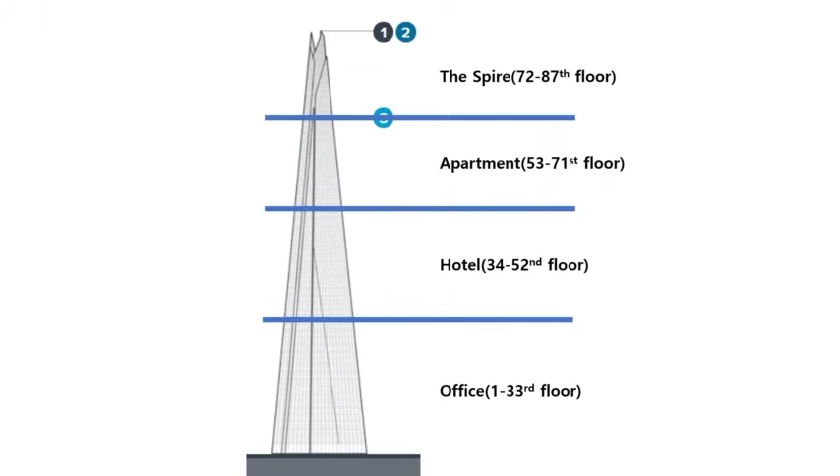Last week, we talked about structure characteristics. The Shard consists of 4 uses. Due to span and small construction area, the Shard is divided into 3 materials, and these materials have their own issues. Today, we will talk about the construction method of the Shard.

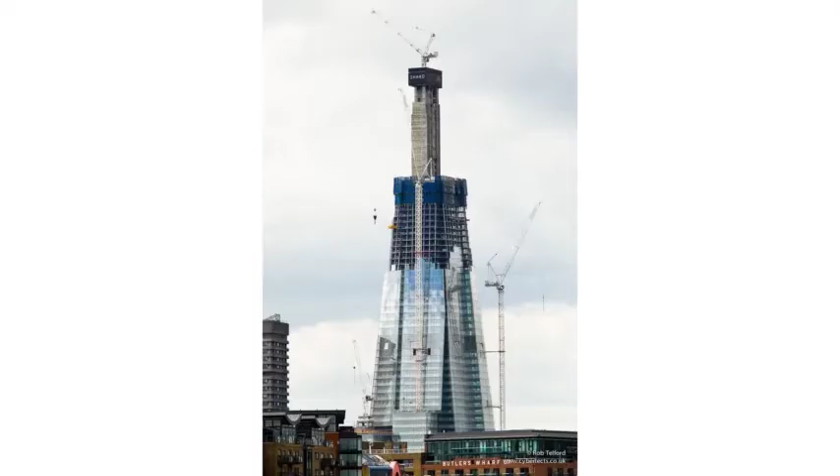In the Shard construction, there are 2 points. First is time. The Shard had to be constructed by the 2012 London Olympics. But the Shard construction started in 2009 due to the global financial crisis. So, the Shard has a 3-year time limit.

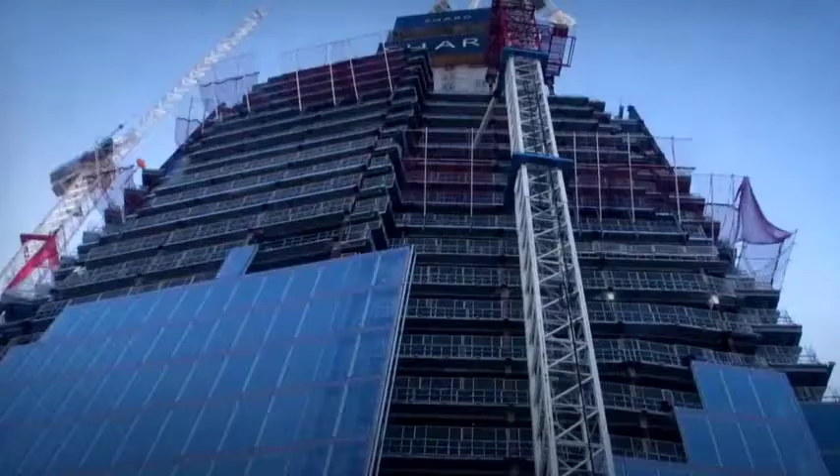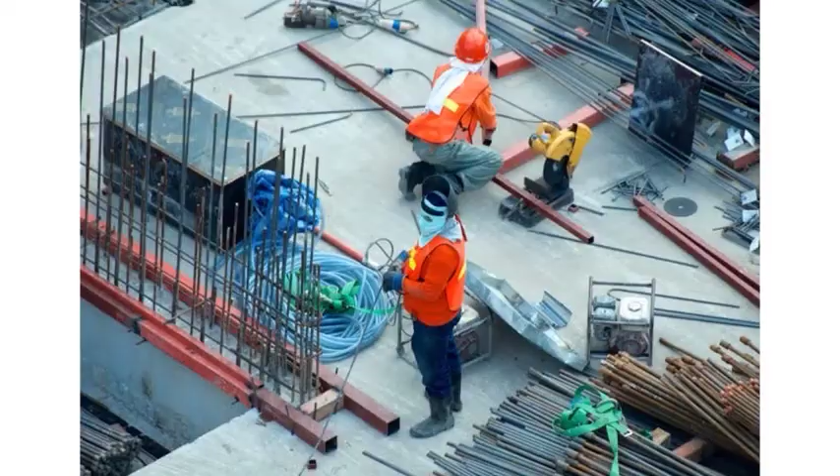4,000 workers, equipment, and materials must be transported 24 hours a day in an unfinished building. As workers increase, the waste of time is bigger. So, to decrease time waste, getting building workers, materials, and equipment to the right place at the right time is very important.

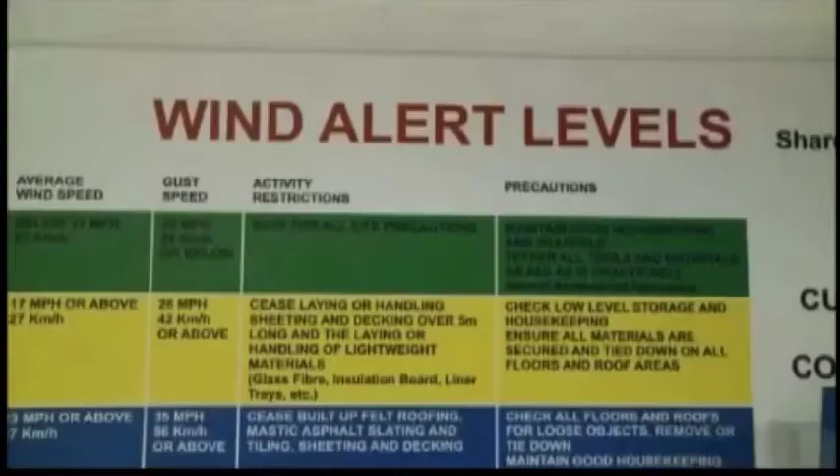Second is wind. By the SimScale simulation, the Shard receives a lot of wind. This can affect construction. To prevent wind from affecting construction, the Shard engineers check the wind speed every day.

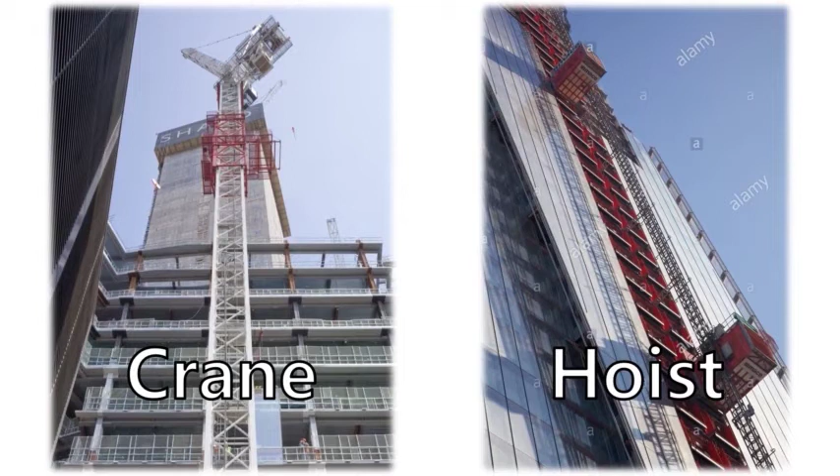Because of these 2 points, there are some problems with the crane and external hoist. The crane can collapse, or the materials in transportation may fall due to the strong wind. And the external hoist was too slow, and it is located outside of the building, affected by weather such as wind and rain.

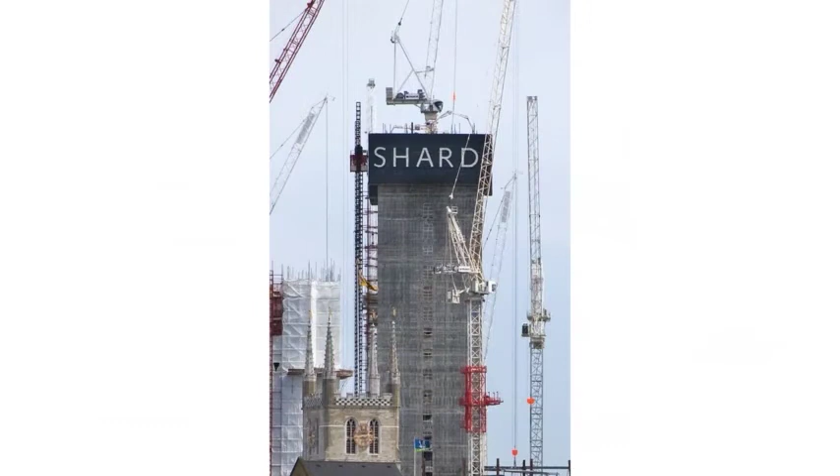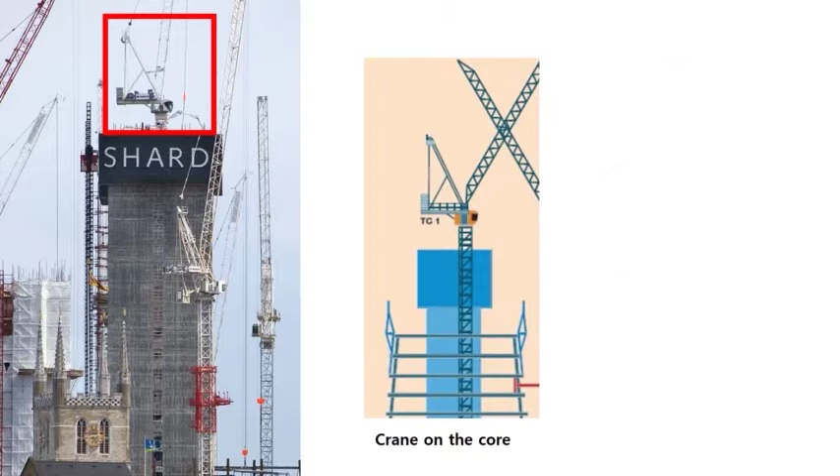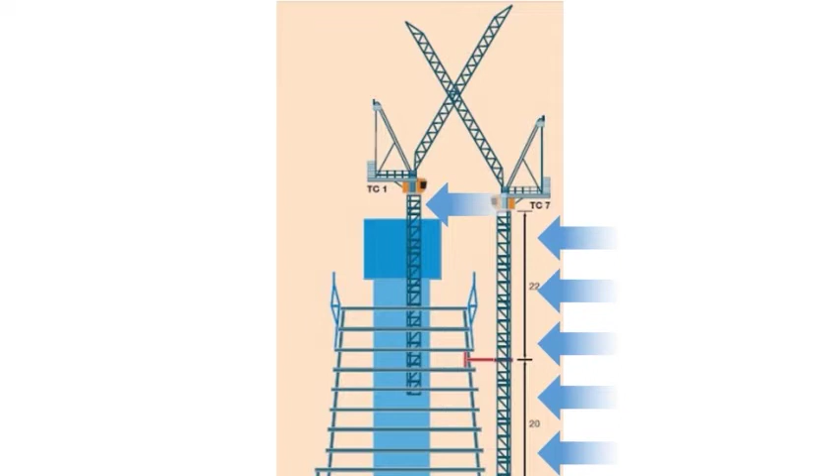To solve these problems, the Shard uses a slip-form core. Over the core, a crane is installed and a jump lift is installed below. The crane on the core, named TC1, receives less wind, and it can prevent wind collapse. This crane is attached to the core, so the core and TC1 go up together. So it reduces the number of crane climbings.

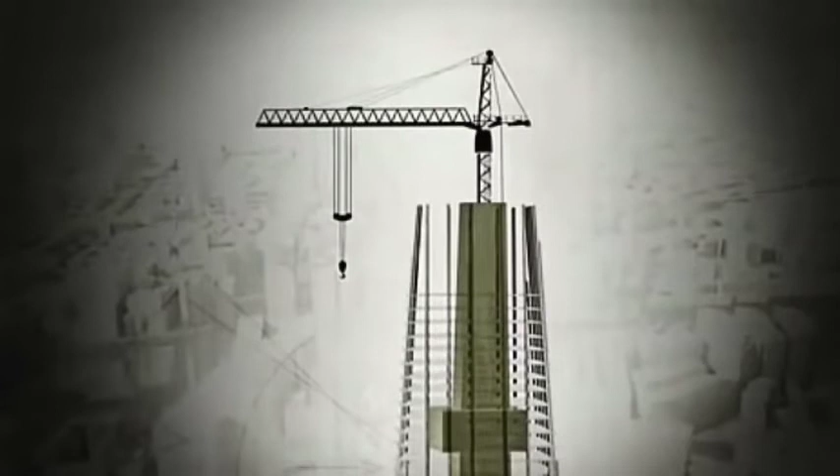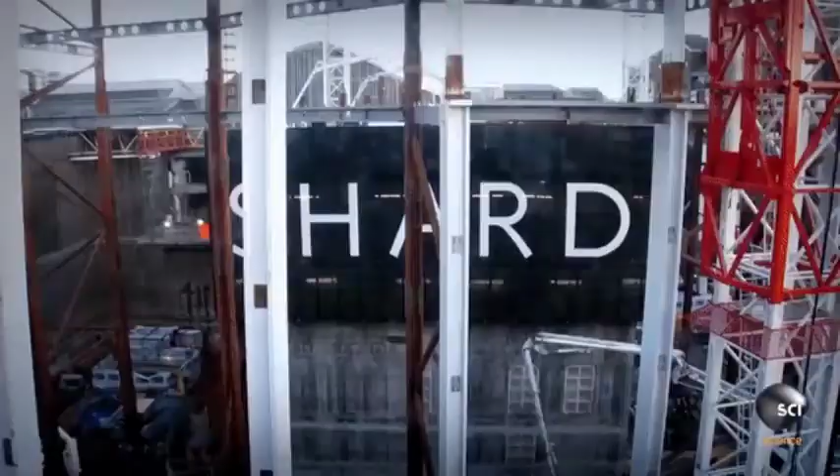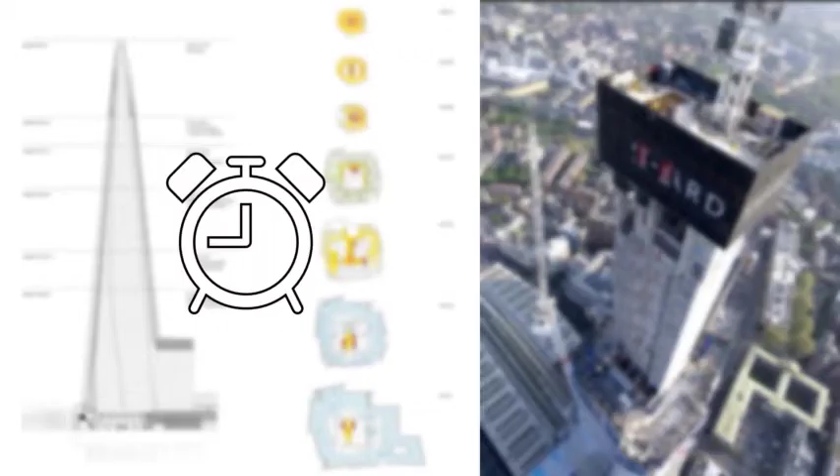In low construction, due to low wind and large area, tower cranes on the ground are used to construct with TC1. But in high construction, because of TC1 and the smaller construction area, there was only one high-rise crane. So they saved the time and money to build extra high-rise cranes or extend crane height.

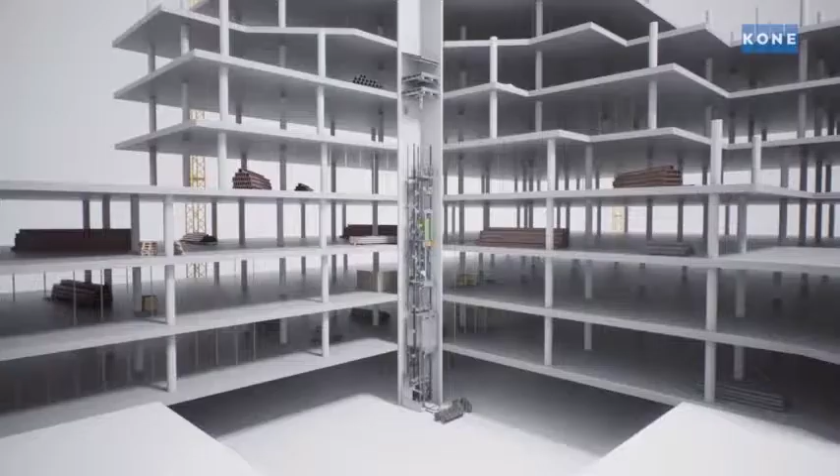Jump lift is an elevator in the core. It uses the elevator hoistway inside the core, so it is not affected by weather and is safe. And the lift is a permanent elevator, so it is fast. To install the jump lift, first, a protection deck is attached to the slip-form, deflecting any object that may fall into the shaft.

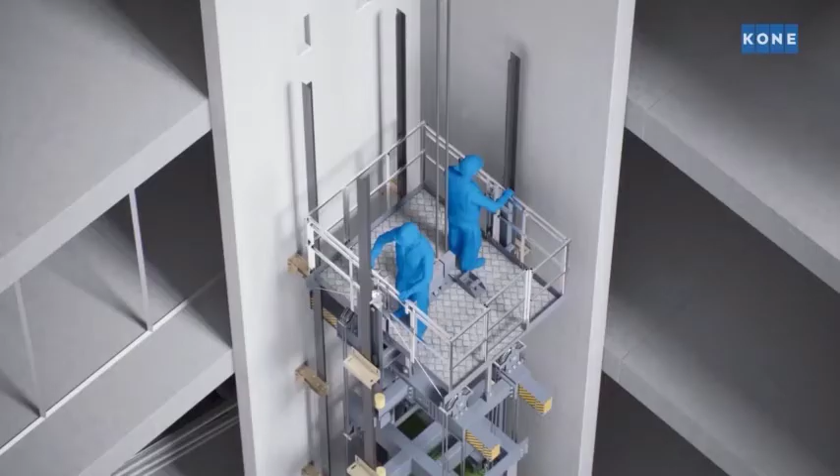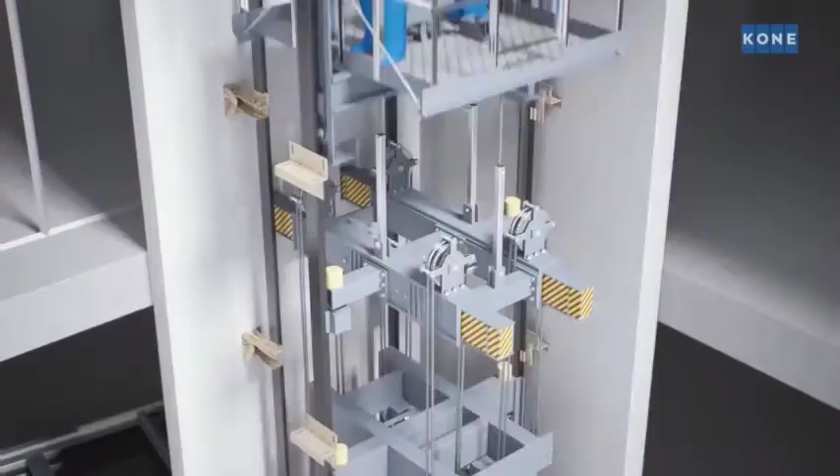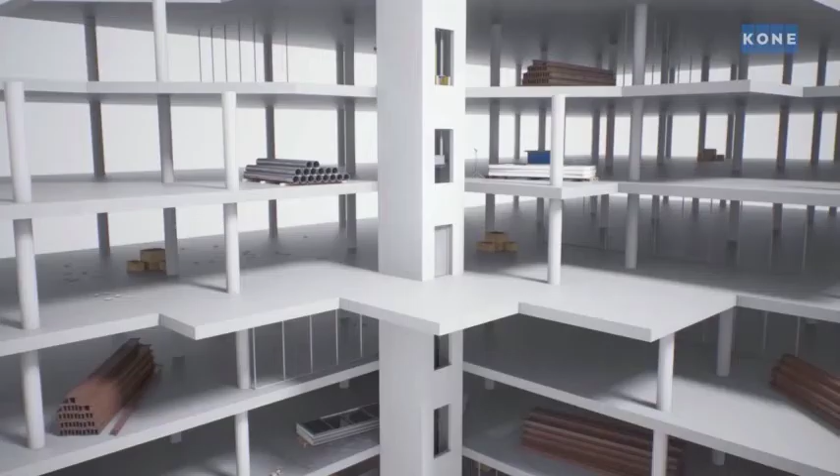Next, the installation platform is used to install the guide rails and other elevator shaft components. Next, the mobile machine room, which controls the lift, jumps as the building work progresses. Then, the permanent elevator, which will be used after construction, moves below the machine room to transport workers, materials, and equipment.

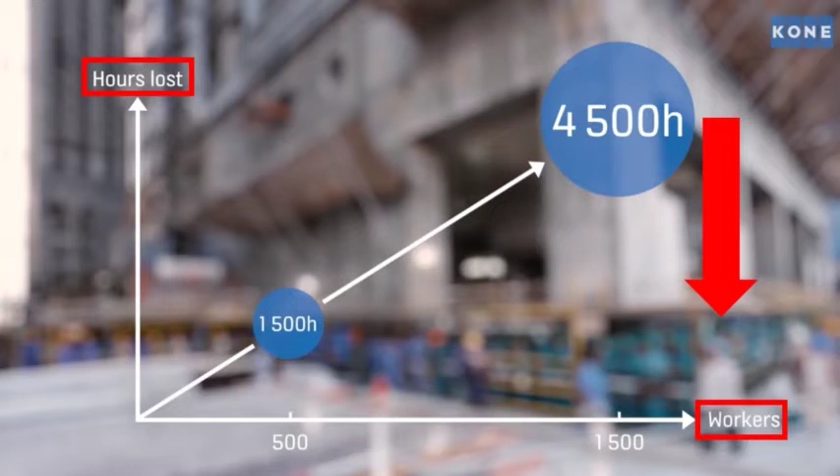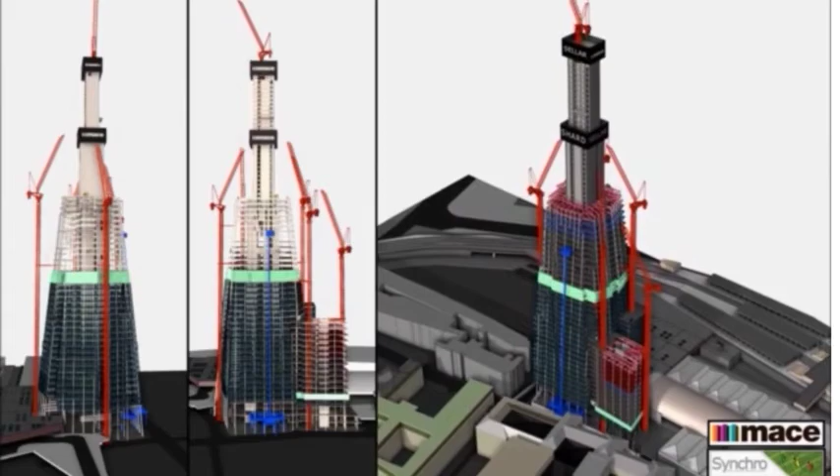Using this system, transportation time goes down, so construction is finished faster and cost decreases. These methods are connected to the slip-form core, so they are extended until the core elevation was over 66 floors. By using these two methods and existing methods, the composite and concrete floor work is operated.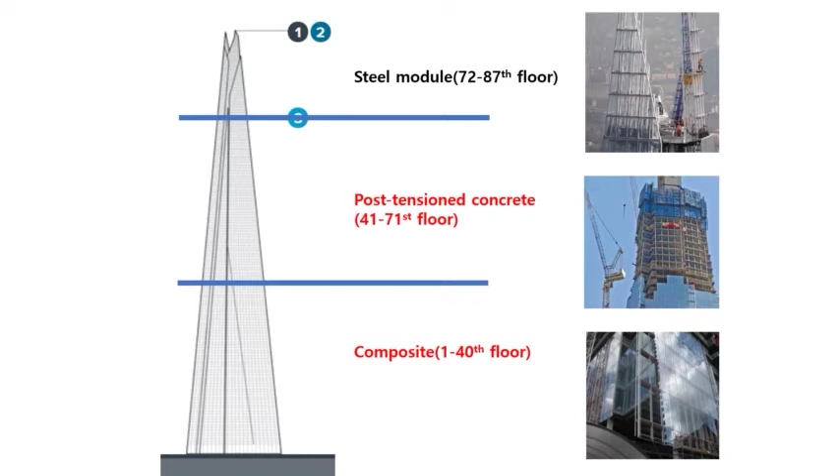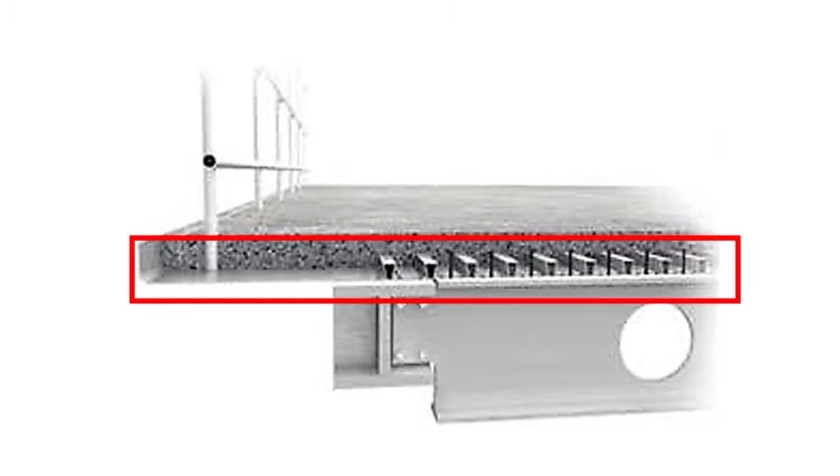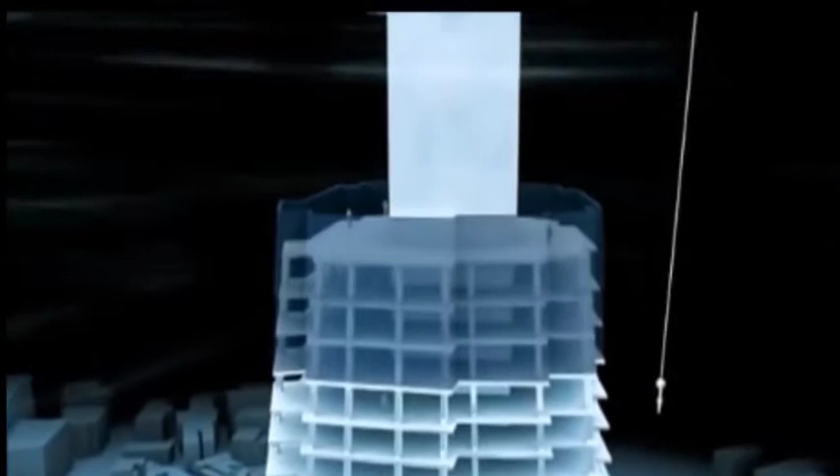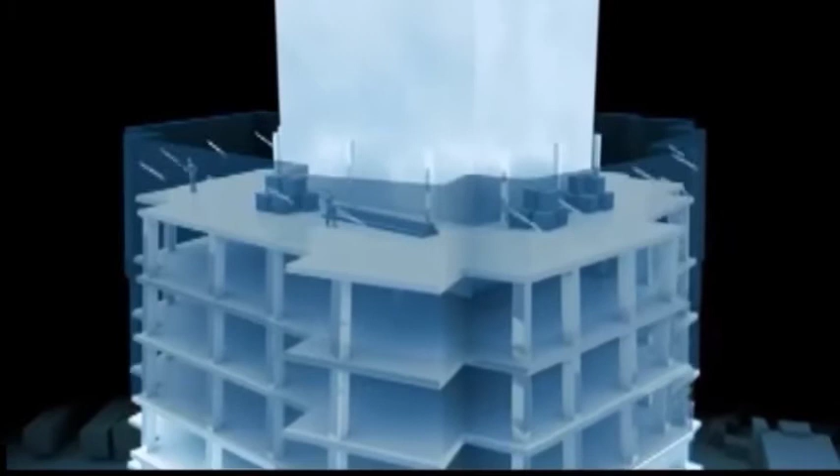In the composite floor, they installed steel columns and beams. A steel embedded plate is on the beam to support the concrete slab, and concrete was poured. In the post-tension concrete floor, to prevent wind during construction of the floor, constructors installed a 3-meter wind wall first. Next, a steel cage is installed and concrete poured, so the column is made.

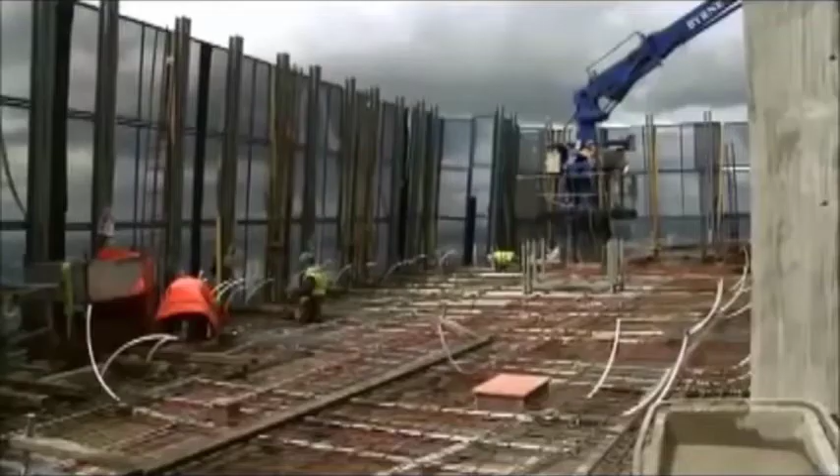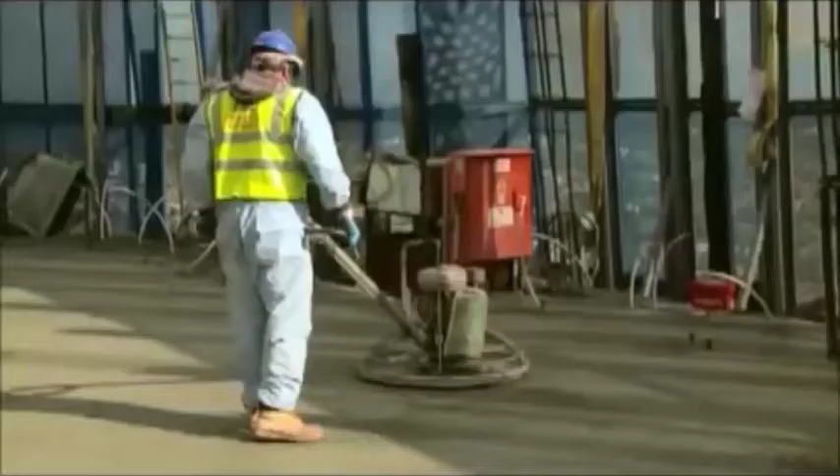Next, floor concrete is poured. It took 20 hours to harden enough. Each floor is finished in a 6-day cycle and the process started again.

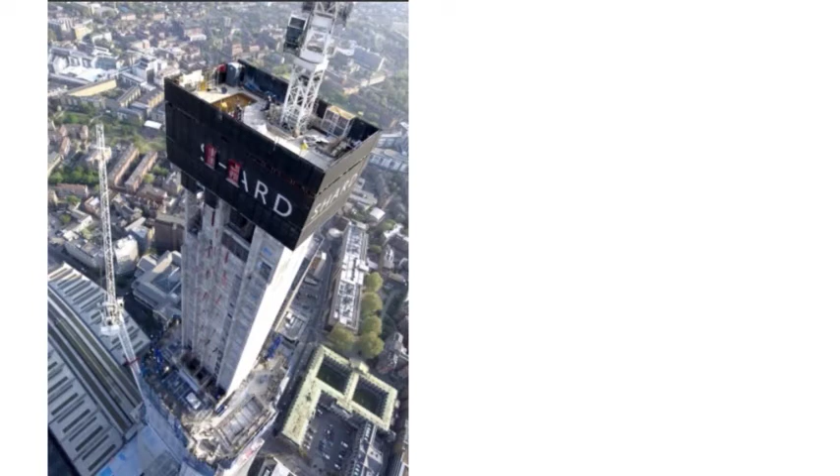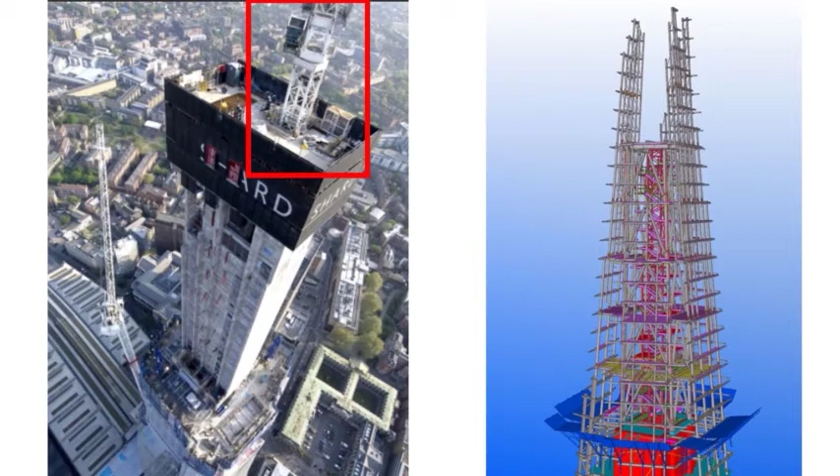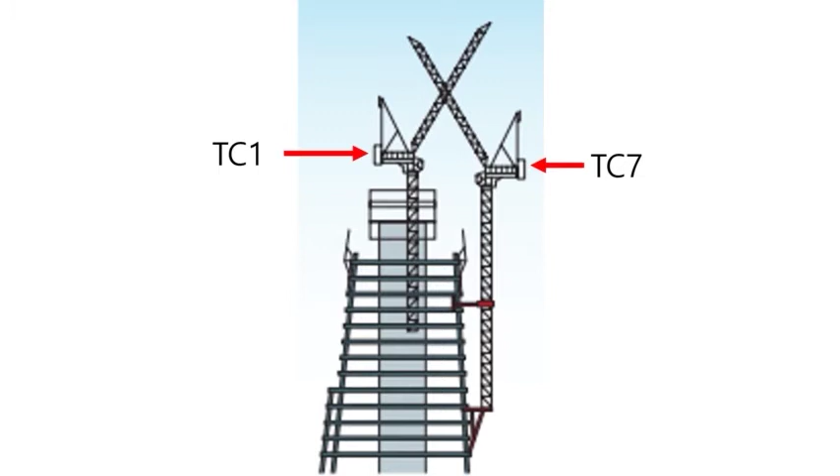In stage five, to install modules on the core, the crane on the core had to be removed. So, by using TC1, tower crane TC7 was installed on level 15.5 beside the core to replace TC1. TC7 constructed the spire level, but assembling the modules has 3 challenging constraints.

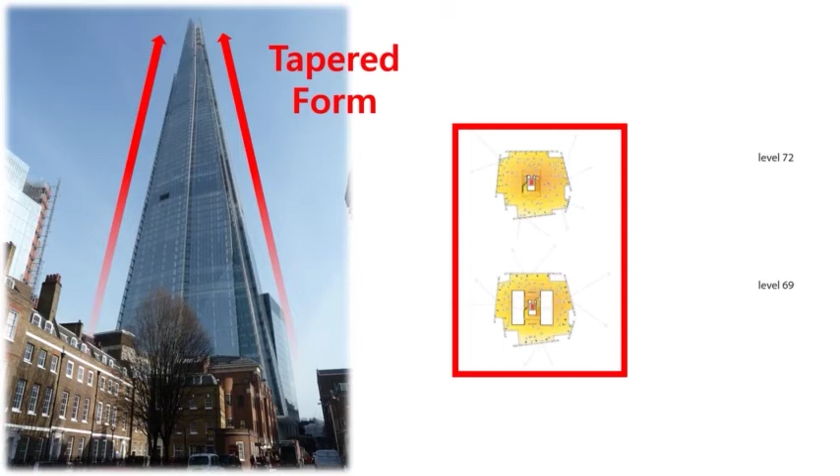First, construction progressed in the winter period. Cold weather and short daytime disrupt the construction. Second, small space at the spire level due to the tapered form of the Shard. Small space can't allow many workers and materials, which limits the speed of construction. Last, the wind blows. This affected the crane movement, which was used to assemble the modules.

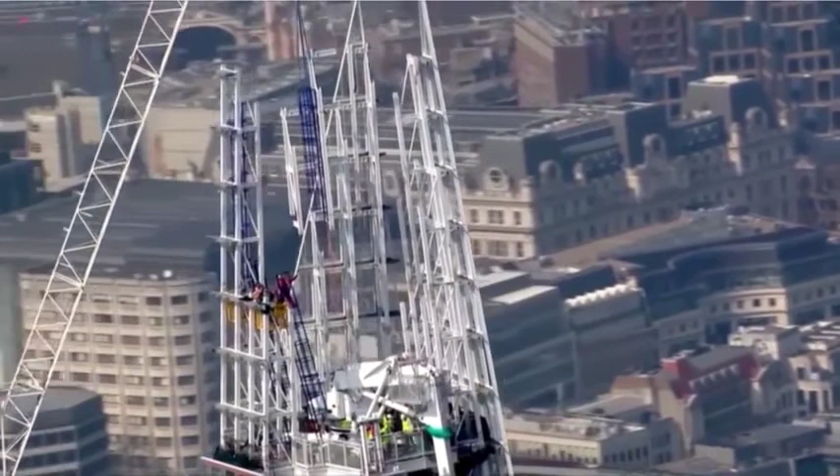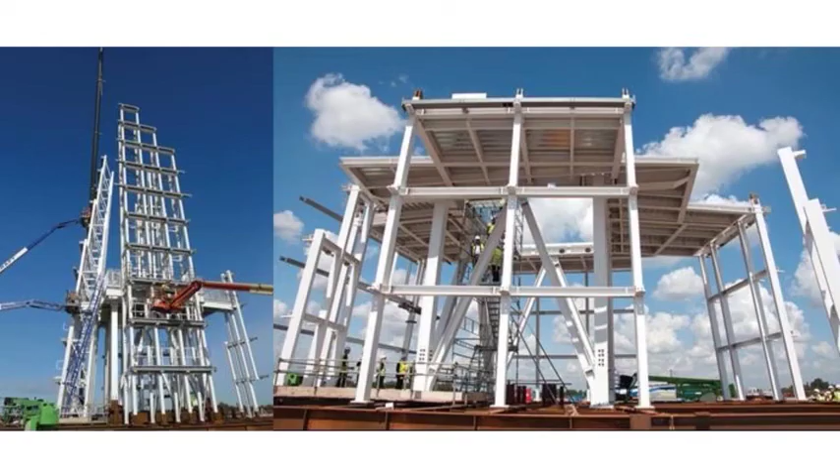Due to these 3 reasons, the construction team had to find methods to minimize the assembling process at the spire level for the safety and speed of the construction. First, they practiced the assembling process at ground level before they worked at the spire level. By doing this, they can reduce the trial and error at the spire level, which can decrease the construction period.

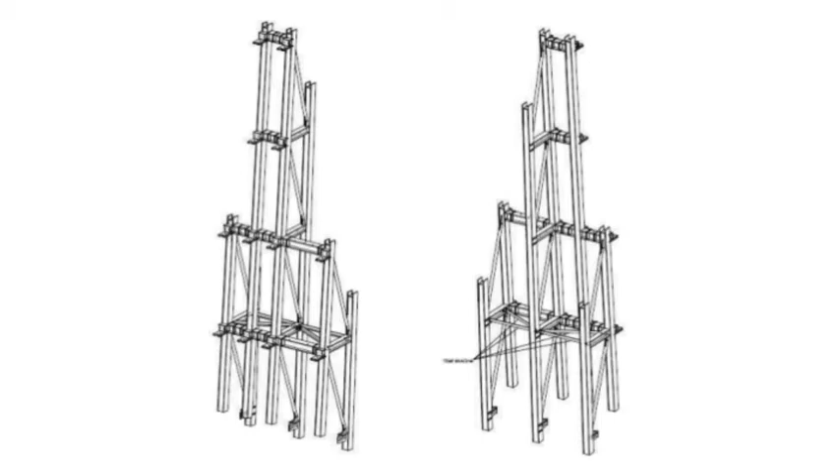Second, each module has a self-stable structure. A self-stable module can be moved to the spire level without bracing, which means they didn't need extra work before connecting each module. With this approach, they can minimize the risky process at the spire level and complete the construction safely.

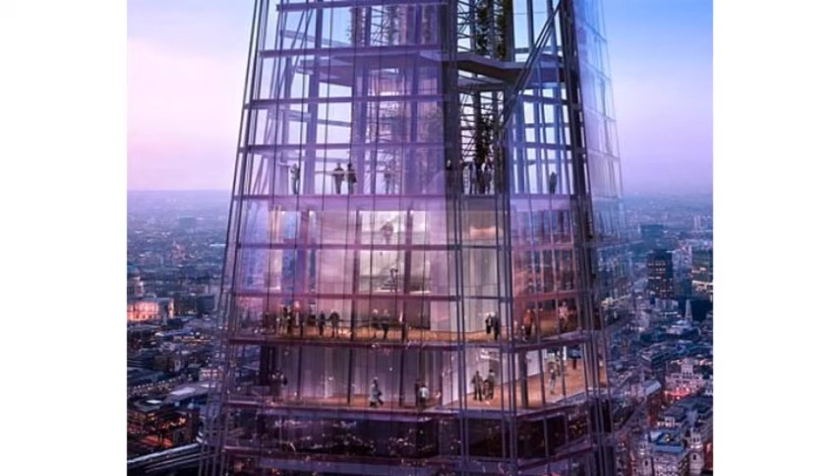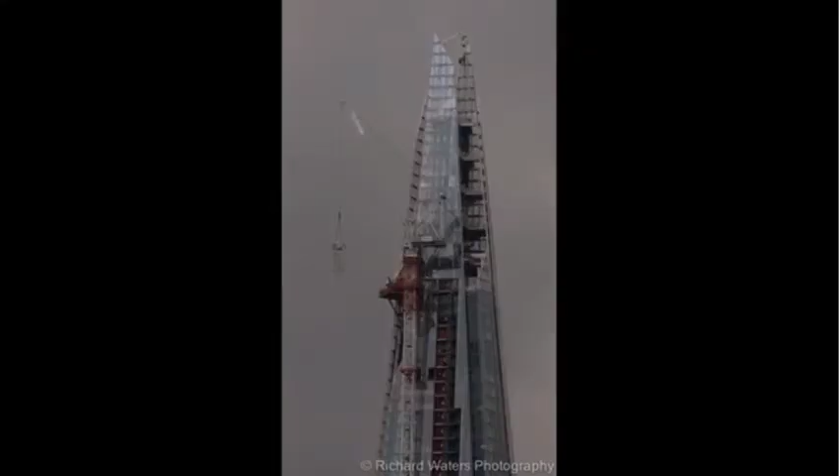The steps of the crane recovery process are essential. The crane recovery process at the Shard building goes through this process. First, adjusting the tie and lowering the crane. When descending, this crane goes down through hydraulic pressure to the 72nd floor. Next, remove TC7 through the recovery crane.

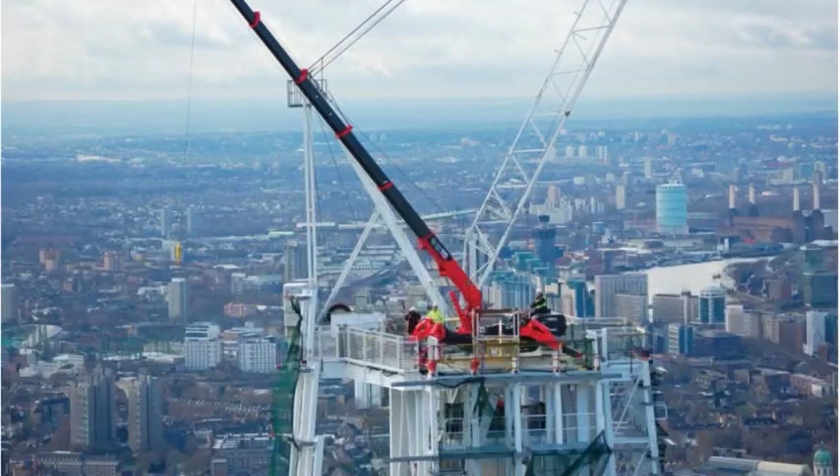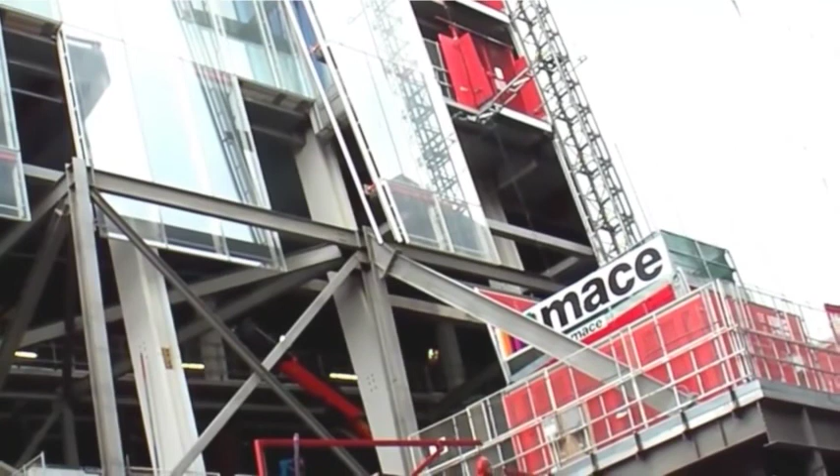Finally, remove the recovery crane via spider crane. Finally, the components of the spider crane and the recovery crane are lowered to the ground via hoist. By the end of the crane recovery process, construction of the Shard is completed.

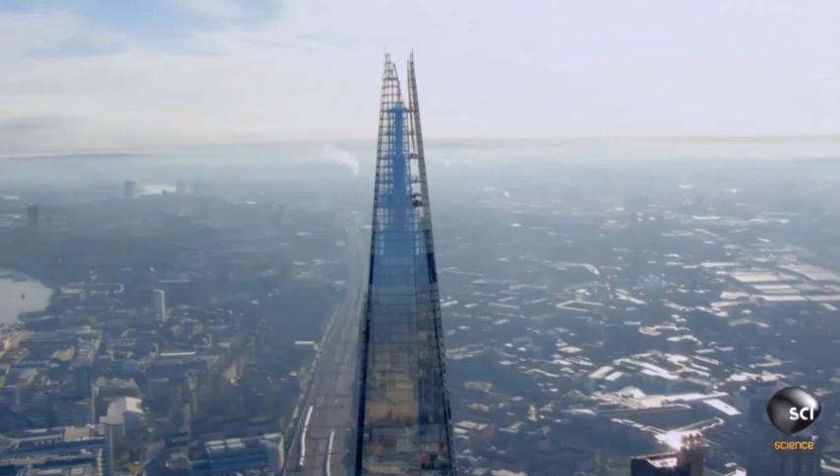This time, we talked about the construction method of the Shard. Next week, we will introduce the building efficiency of the Shard.